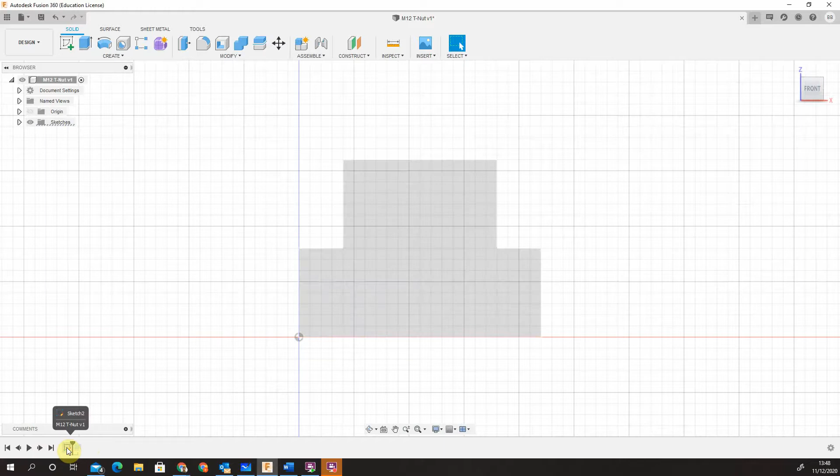Here we have a very basic M12 T-nut that we've produced using the extrude function from a basic profile sketch. I can switch back and show you the sketch here, which is on my front plane, a very basic sketch. If I open it to show you edit sketch with some very basic simple dimensions.

So I'm happy with my sketch. I'm just going to re-upload my model and flick around to isometric viewpoint. On top of a T-nut is always a hole which we can put our stud bar or our bolt through to secure any work into our machining process.

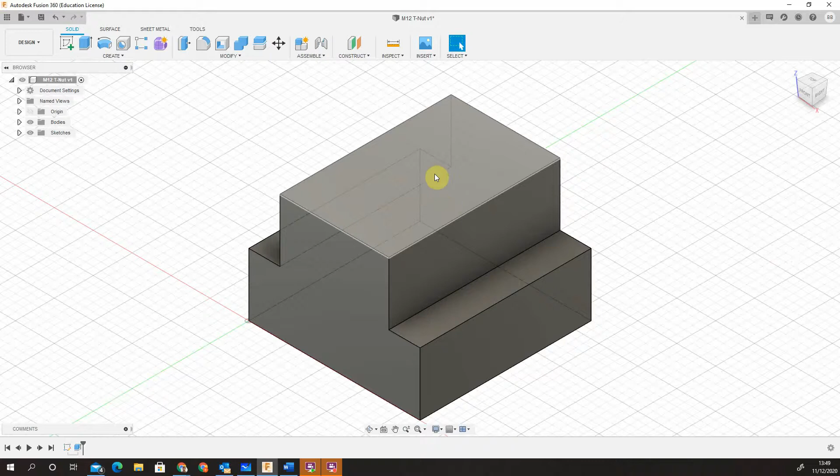So what I need to do is put a hole which I could then either thread or show a thread, so that when I create a drawing I can send it to one of my machinists.

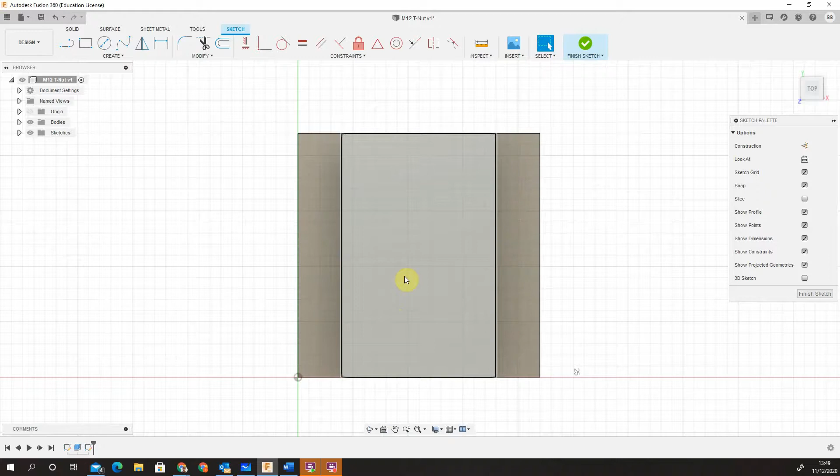Very simply, on this face or surface, I'm going to click to highlight it blue, right click, and create a brand new sketch. On my sketch I'm just going to pan so I can get a good view around, using the pan function on the toolbar, or holding down the middle scroll wheel. Or I could use the top view section and go to my top plane view and rotate around to a view you're happy using.

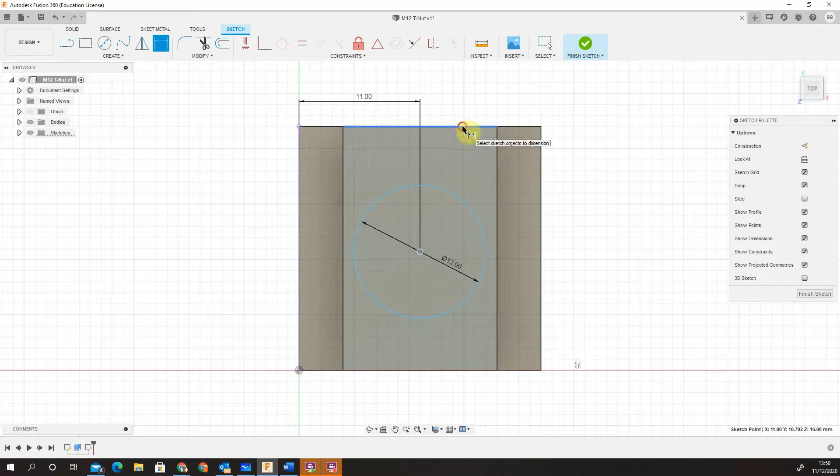On the surface, I'm going to create a 12mm hole, because that's the size of the thread, so it's an M12. I'm going to dimension this essentially in the center of my component. My actual component is 22mm wide, so it'll be 11 to get the center.

So that's my sketch, that's where my hole is going to be, and now we need to cut this hole through. In Fusion 360 there isn't actually a cut function like there is in other software such as Inventor or SolidWorks. So what we actually do is use the extrude function, which is within your create toolbar, or you can press the E command on your keyboard.

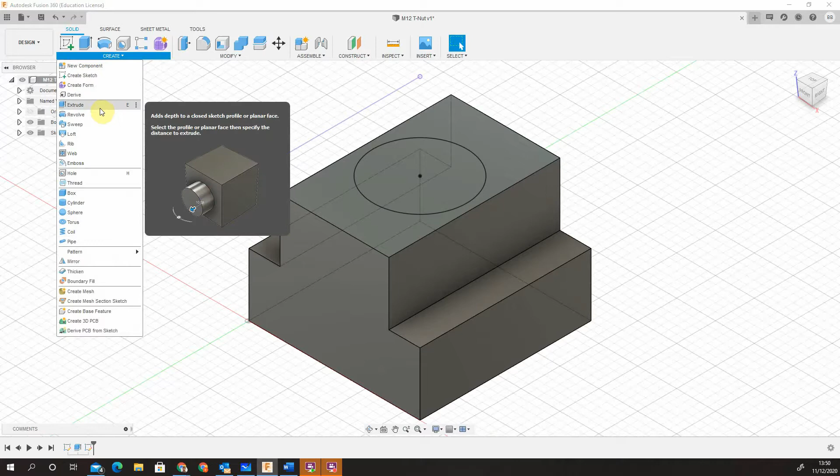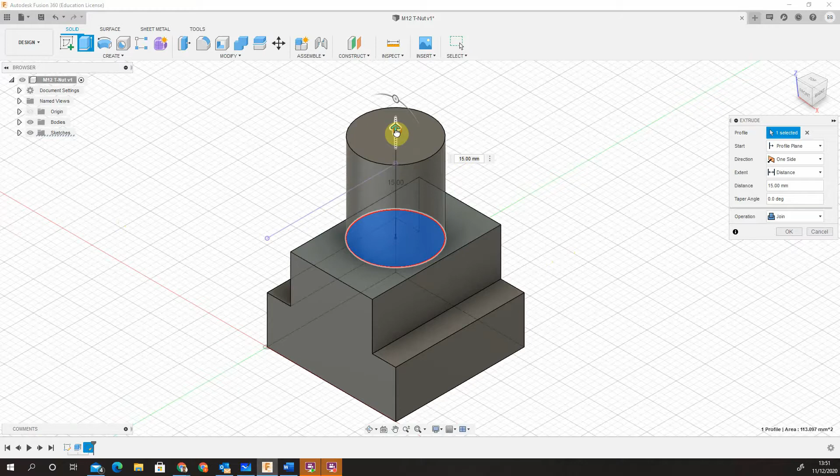What we do is select the hole. Now if we actually wanted a hole feature extended out from our T-nut, we'd extend it and make sure we have either the join operation or new body operation, so it symbolizes a new surface. Or we can actually pull it through our material and make it cut.

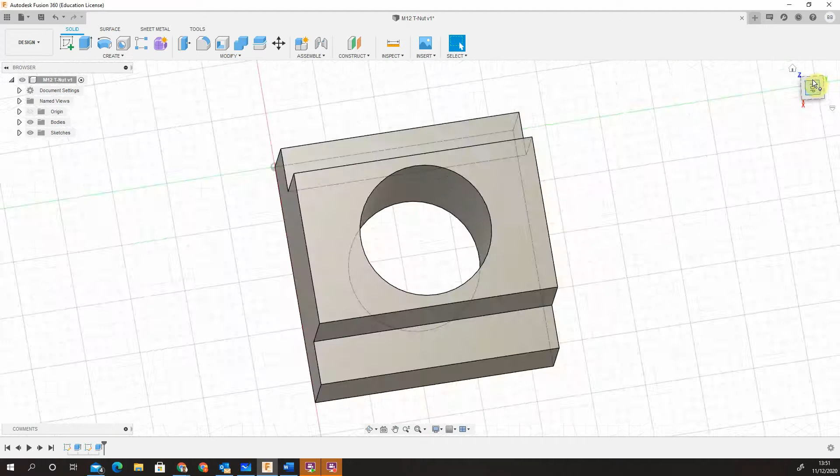So what I want is to go through all of the objects. I'm going to change my extent to all, make sure we're in cut mode, select my profile, which is my profile sketch of a circle, and hit OK. Now as I orientate around, you can see that I have a through hole which is 12mm.

So that's a good way of producing a hole. However, it isn't a threaded hole, so if I took this to a drawing phase, I'd just have a diameter 12 hole. And with internal threads, the hole size wouldn't actually end up being 12.

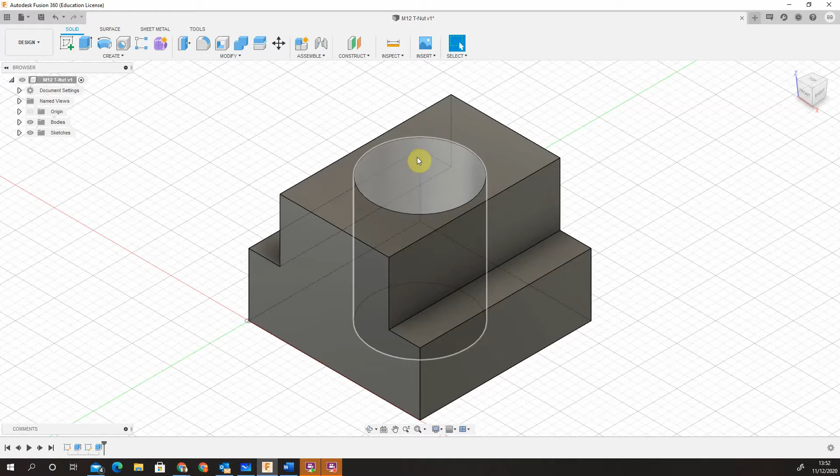I'm using an M12 times 1.75 coarse thread from the ISO metric scale. Essentially that would then be a 10.2 hole rather than 12, and then we'd tap out using a hand tap or a machine tap to get to M12. So that's one way I could do it.

I'm going to show you the other way within this system, which is you could use the hole command. Say I'm going to place it on the top, I'm going to spin my top view around.

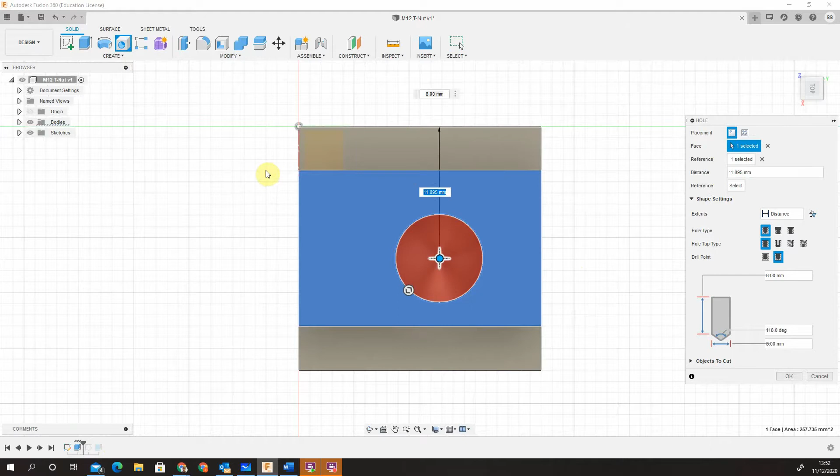I'll make two reference points. Select the top, make my reference point, which can be 11. My second reference point here will also be 11, which should put me in the center. I'm then going to choose through all, same as last time.

My hole type, I've got simple, counterbore, countersink - it's just a simple tapped hole. Hole tap type: simple, clearance hole, tapped hole, or taper tap, so I need a tap. Thread offset: I've got a full thread, or I can offset the thread, so I need a full thread. And a drill point, because it's through, it doesn't matter, it's going to be essentially an angled and a flat all together.

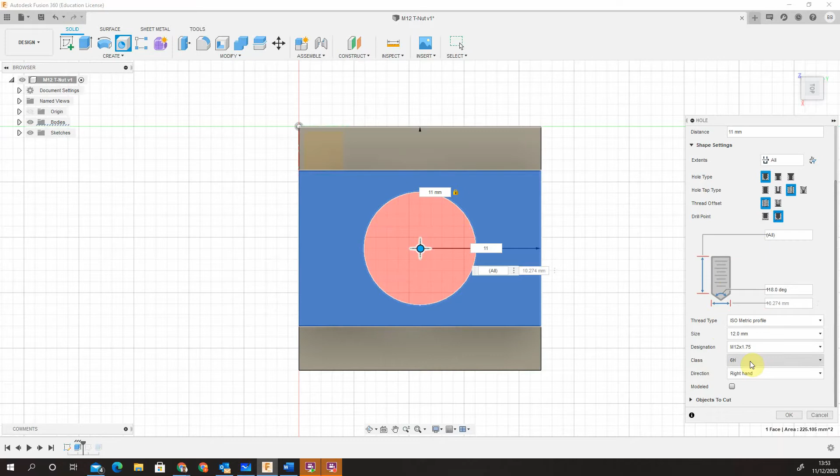Coming down, I'm going to choose my ISO metric profile, which is what I want. I'm going to change it to 12mm, select M12 times 1.75. It's going to give me a classification with limits and fits banding to 6H, right hand thread, which is what I want, and then I'll OK that feature.

Now I have a symbolized thread rather than a straight through hole like I had beforehand. So you can actually see when I come back, the actual hole is a lot smaller than the original 12mm hole, and that's because when we machine an M12, we actually use a 10.2mm drill, and tap the extents of our pitch out to then M12.

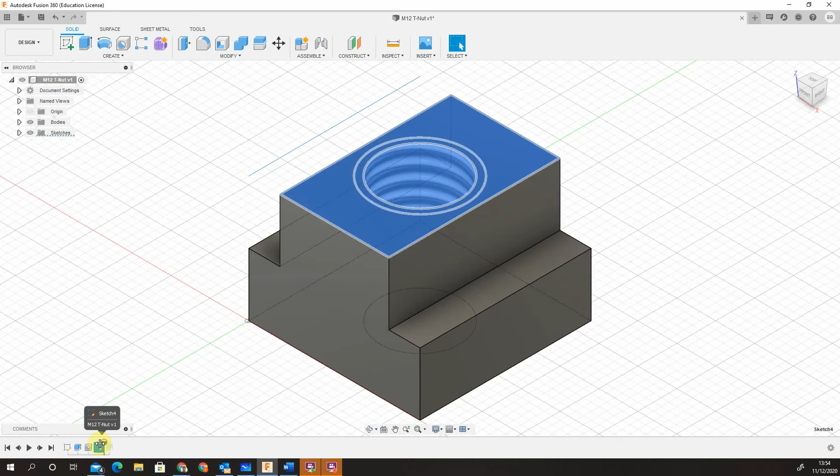So there we have it. That's how we basically use the cut function within the extrude, and a basic tapped hole using the hole function.